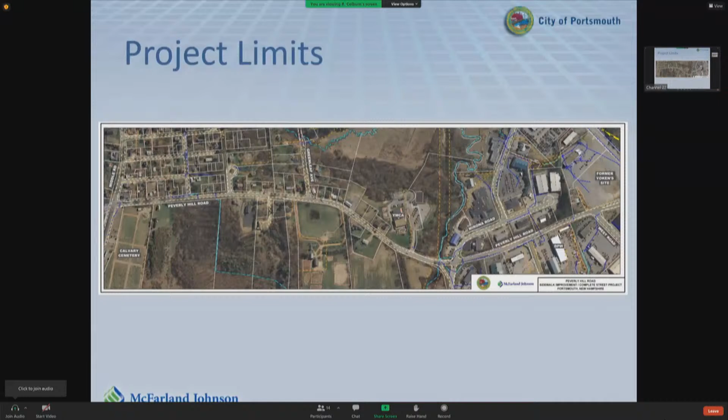The current design is to construct two 11-foot travel lanes with 2-foot shoulders on either side, have a 6-foot sidewalk on the east side, and a 10-foot shared use path on the west side. For most of the length of the shared use path, we would have a 3-foot grass strip separating the path from the roadway, although to accommodate some of the property owner concerns, there are a couple places where we've eliminated that grass strip.

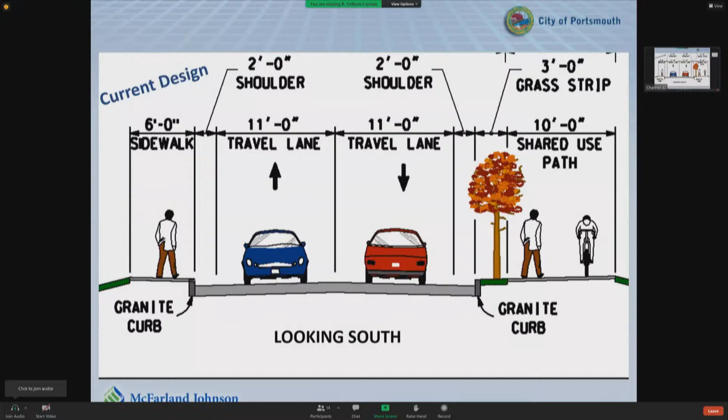I'll be showing various versions of this image, so just to orient you, this is if you're standing on Peverly Hill Road looking south towards Route 1. This is a plan view, again just to orient some people - south is to the right, north is to the left. The gray area would be the proposed pavement surface. Orange are just driveway matches that we would do as part of the project. The light blue is the sidewalk or the path, depending on which side of the road you're on. And the dark green area is the amount of lawn or grass that we would need to regrade as part of the project. The dashed white line is the existing right-of-way along Peverly Hill Road.

So again, the current design has a sidewalk on the east side and a shared use path on the west side. We were asked to evaluate if we were just to provide the sidewalk on the east side, but provide bike lanes - these are 5-foot shoulders instead of 2-foot shoulders. So at this particular spot, that's what that concept would look like. You can see the roadway's 6 feet wider than the current design, but there is no side path on the west side because we would be able to accommodate bicyclists within the roadway.

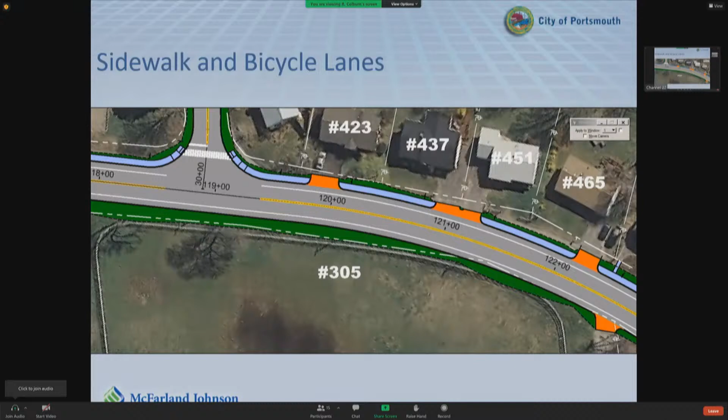We were also asked to look at what if we just added a sidewalk only to the project. So here is the narrow roadway with 11-foot lanes and the 2-foot shoulders with just the sidewalk on the east side and no multi-use path on the west side. This option would accommodate pedestrians and motor vehicles, but bicyclists would need to ride in the lanes with the vehicles - they would not have their own accommodation.

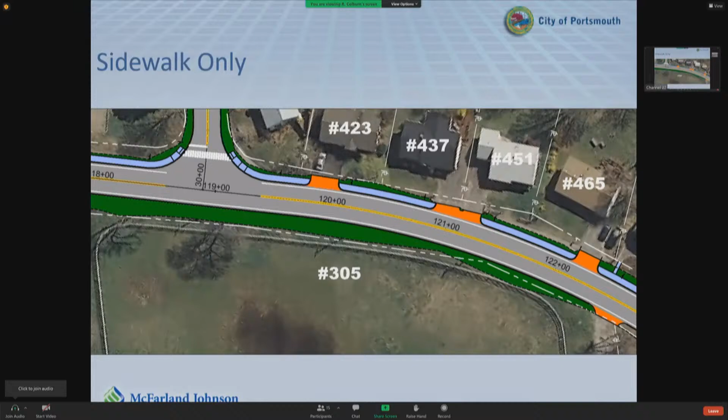One of the concerns we heard early on in this project is about the speeds of vehicles traveling down Peverly Hill Road now. So that is one concern with this option to provide bicycle lanes, since we're widening the roadway, and typically wider roads produce higher speeds.

This was comparing the current design with the option to just provide the sidewalk. You can see for the most part they're the same, with the exception of that shared use path. But you'll notice on the slide at the bottom where we just provided the sidewalk, there really is no accommodation for bicyclists, so they would be riding with cars.

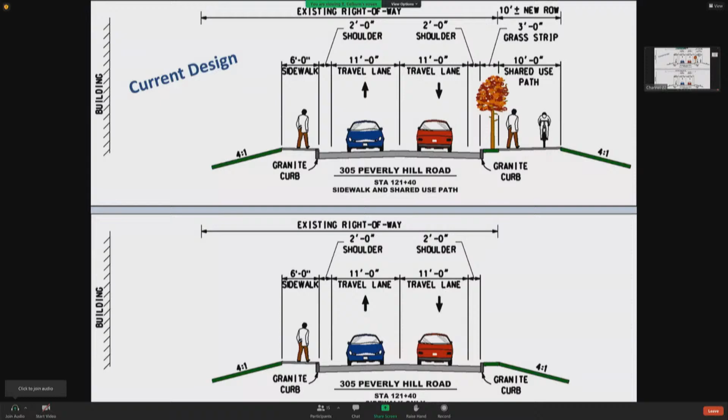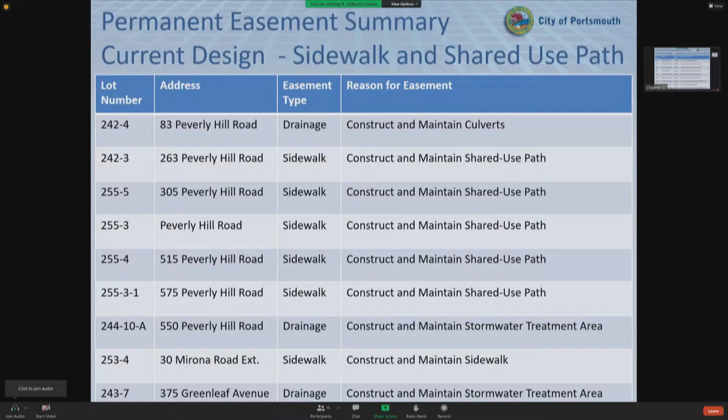We wanted to compare the options based on the amount of permanent easements the project would require. With the current design of the sidewalk and the shared use path, the project needs 9 permanent easements, some for drainage, some for the shared use path, and some to maintain the sidewalk. If we were to switch to constructing the sidewalk and bicycle lanes option, 3 of those permanent easements would no longer be required because the footprint of the project would get narrower.

But as you can see, we would still need 6. If we construct the sidewalk only, that number drops to 4, and 3 of those are for drainage related

needs. As we reconstruct any road within the city, one of the tasks we have to do is make sure we're providing stormwater treatment as part of the project. It's part of a permit the city's obtained, so 3 of these are just a result of that. The 4th one, near Mirona Road, is where the sidewalk actually would extend outside the existing right-of-way, so we need a permanent easement for the sidewalk area.

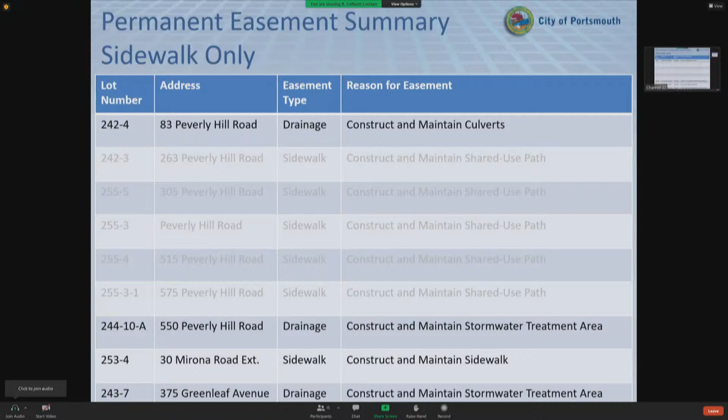Now, a temporary easement is just that: the rights for the contractor to come onto the property, in most cases just to blend in the driveway. We extend outside the right-of-way just to provide a reasonable slope to the driveway. But there are some areas where we would require some grading behind the sidewalk, replanting the grass, and in one case we need to build a retaining wall along the right-of-way line, so we'd need a little room to do that.

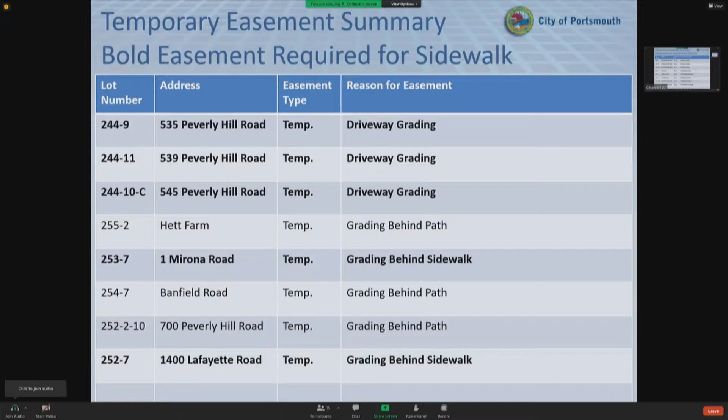So you can see here all but 2 on this page are needed for the sidewalk; the other 2 are needed for the multi-use path. And again, working towards the south, here's another 8, where 5 of them are needed on the sidewalk side of the road and 3 would be needed as part of the path.

So we put together this comparison matrix to try to summarize some of the key issues as we decide which way to move forward. The first two were accommodate bicycles and slow traffic, and again, these were two points we heard early on in the project from the public that really helped frame the purpose and need for this project.

We've highlighted the number of permanent easements that are required, whether a necessity hearing, which the city council would need to act on, is needed, how each of the options is influenced by New Hampshire DOT's funding, and then how it impacts schedules and consistency with both the Complete Streets policy and the master plan.

I just want to highlight, as mentioned before, if we only construct a sidewalk, the accommodation for bikes is not there. And because we would be curbing the road, as opposed to right now where there's no curb, some bicyclists might actually feel it's worse. Right now, if a bicyclist is riding with traffic and feels crowded, they can simply go off into the shoulder. Once we provide curbing, at least on the sidewalk side option, they wouldn't have that option—they would have to actually hop up over the curb. So that's why it says worse there.

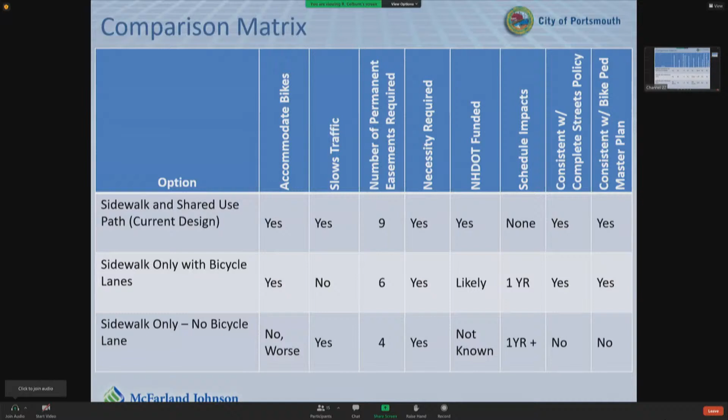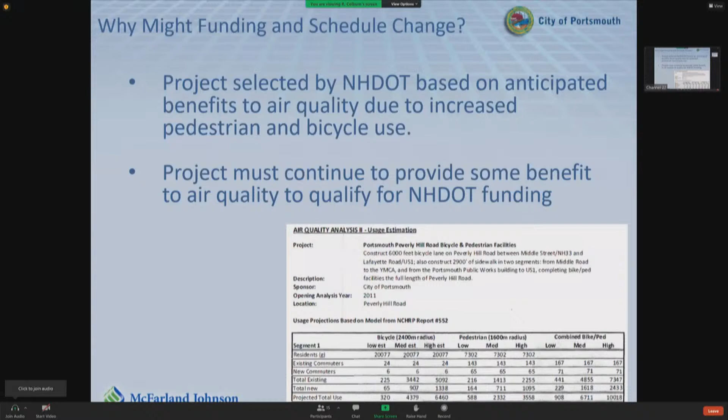So just to highlight again, that's a snippet of the air quality analysis that the city and the Regional Planning Commission undertook to demonstrate that the project as envisioned produced an air quality benefit and congestion benefit. That would need to be redone if the project is changed.

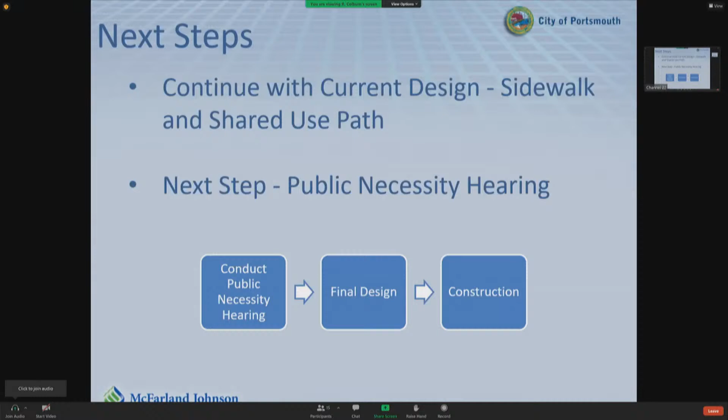So next steps: if we continue with the current design, which is the sidewalk and the shared use path, the next step is for the City Council to hold the public necessity hearing. That would allow the project to move into final design and start to acquire the right-of-way. Once that is done, we move into construction.

If the preferred design switches to a sidewalk and bicycle lane concept, the next step would be for us to seek New Hampshire DOT concurrence that they agree that alternative still meets the purpose and need for the project. We expect that they would. We would then move to a public meeting to confirm with the general public that that's where we want to proceed.

If everybody's on board, we have to redesign the project. We're about 60% designed right now, so we would need to go back and redo our engineering drawings and reevaluate how the project impacts the environmental and historic resources along the corridor. After that's done, we would basically be back to where we are right now with the current design, still needing to conduct a public necessity hearing in order to move into final design and acquire right-of-way.

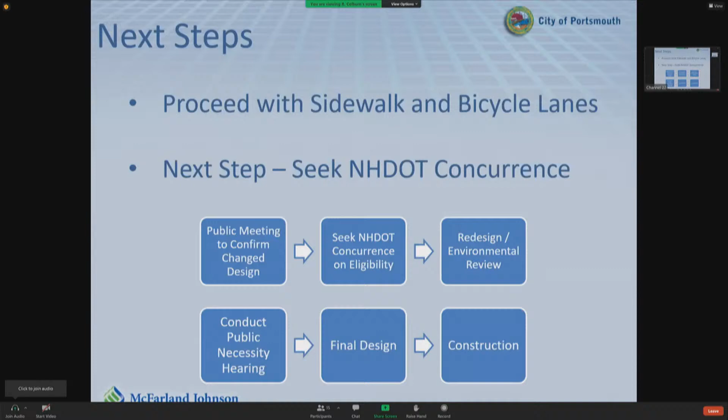If we proceed with the sidewalk-only option, there's a few more steps with this, as I mentioned before. Again, we'd have a public meeting to confirm that the public supports the changed design. We would need to seek New Hampshire DOT's input on funding eligibility. They would likely reach out to the Regional Planning Commission to have them redo their air quality analysis, and then they would either confirm or say that the project is no longer eligible for funding under that program.

We would likely come back to the city council once that determination is made to see if the city wants to proceed. Obviously if the funding formula changes—currently it's 80% funded by the state, 20% funded by the city under that program—if we fall out of that program and it becomes a 100% city-funded project, city council will need to decide if they want to continue to move forward.

If they decide to do that, then we would proceed with redesigning the project and reassessing the environmental impacts, and get us back to the necessity hearing and then on to final design.

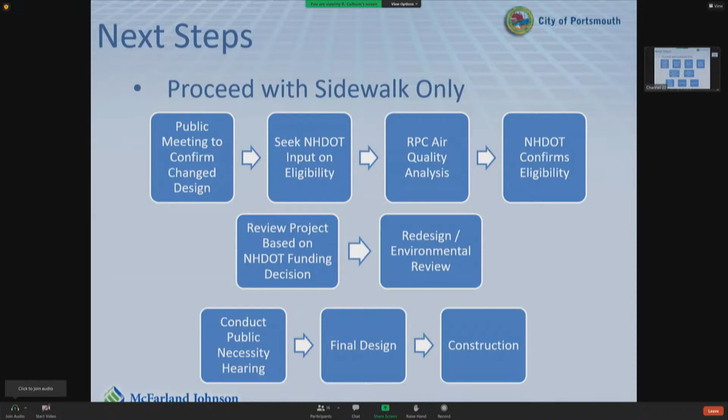As Brian mentioned, all options require a public necessity hearing. Because of that, staff wants to recommend the one that benefits the most residents for this project, and we believe the original design as it stands is the best benefit for the residents. We feel that the accommodations made to adjust the design address and mitigate the concerns that have been expressed, and therefore that's the recommended option staff are making.

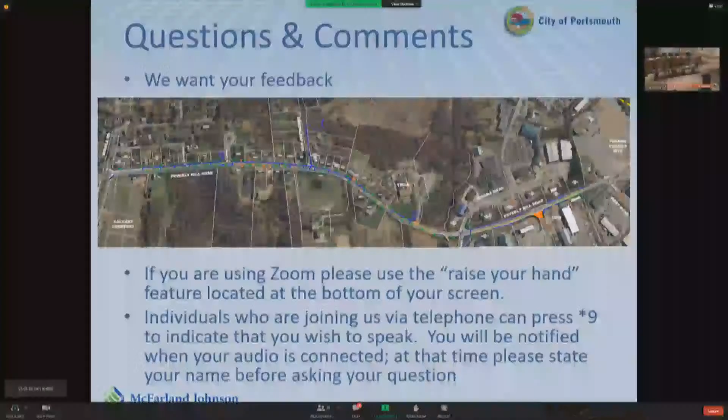And I appreciate the opportunity to speak and support this project. My partner and I have lived on Peverly Hill Road at 541 for about 8 years, and we really experienced how horrendous the traffic is and how unsafe it is. As a matter of fact, when we built our house 8 years ago, we were not able to put in our own driveway because of how dangerous the road is. So we're in full support of the project as proposed, with the sidewalk and the multi-use lane. I think there were a lot of good points brought up today about people losing parts of their property, and it sounds like the city is trying to make accommodations and reduce the width of the multi-use lane to accommodate some of those residents. So I'm in support of that as well.

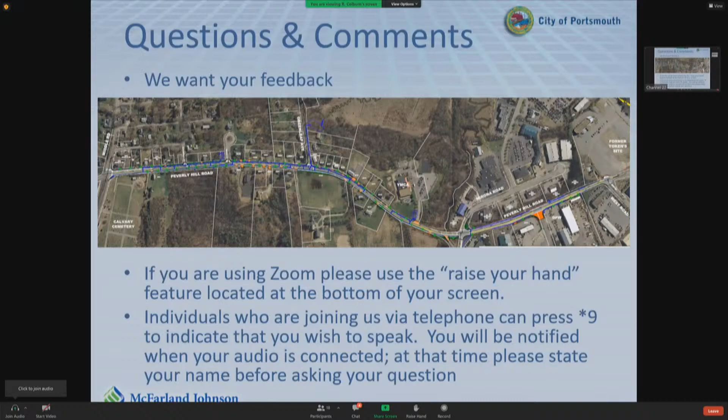I really appeal to everyone to proceed with the project. It's been so many years in the making, so much investment, both emotional and financial, has gone into this. Don't delay this any longer. There's so much support from the residents as well as from other parts of the city that I think there is significant benefit to moving forward with the proposed path. Thank you. Anyone else wish to speak?